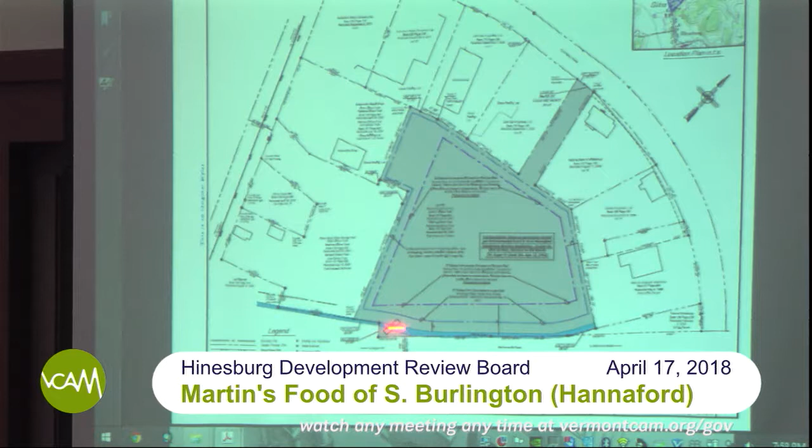I find it hard to believe that attorneys or engineers familiar with Vermont statutes and so forth did not have some concern about the enforceability of the plat line.

I just find it astonishing that with tens of thousands of dollars spent on this application, this issue had not percolated through the review process internally. Believe me, had we been aware of it, given all the issues there were, this would have been fairly minor in the context of everything we reviewed over 15-some hearings with this board. We would have raised it. So we were unaware of that. I'd like to believe that.

I believe an argument was made either in your application or in the staff report that some of the other buildings in this subdivision have been built within setback. There was a reference to the post office specifically, which is closest to the canal. I'm interested in knowing what part of that building is within the 75-foot setback, or am I dreaming? I'm happy to respond to that.

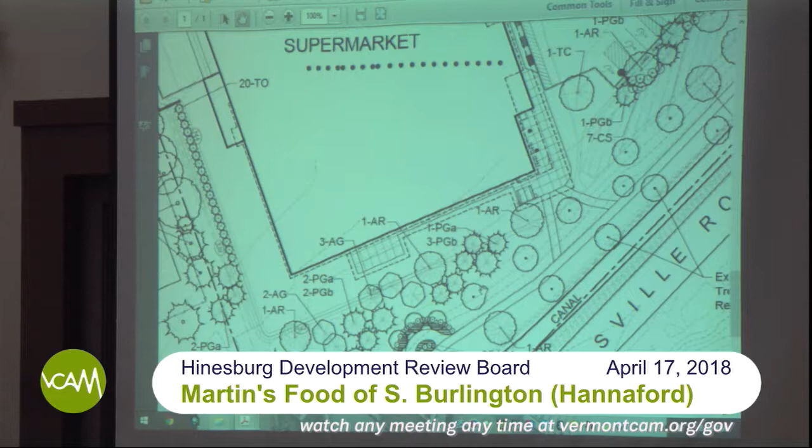And by canopy, you mean overhang? Yeah. How much is walking under that? We will be showing those when we get to the site plan review, but roughly 6 feet or something? Let me think about this - 30, 15, maybe. I don't want to guess at a distance here because I have not scaled it. I don't know. Okay.

But again, we're simply trying to be consistent with what was approved previously by this board, albeit we were not aware of the 75-foot shown on the plat - perhaps we should have been - and consistent with current zoning that's been in place for many years, and consistent with other decisions that have been made by this board previously.

Okay, can you move over to the parking lot area, Mitch?

Is this the area you want? So those are all parking spaces along the trees, trees on the outside. So this is the edge of the parking lot right here, right?

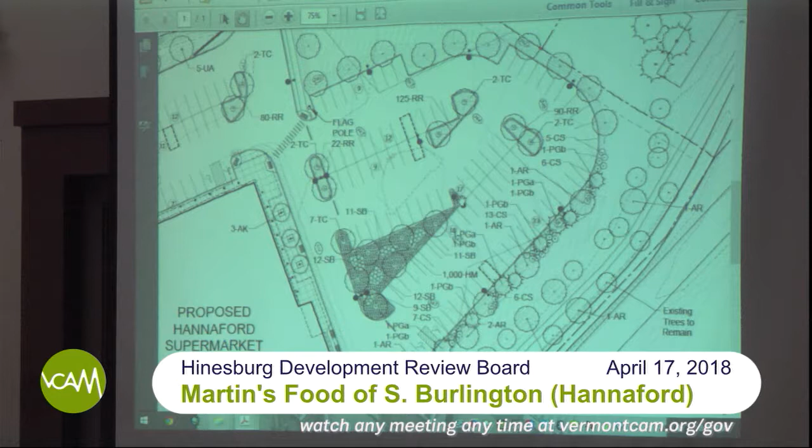Which is how far away? I don't know, Paul, do you have that?

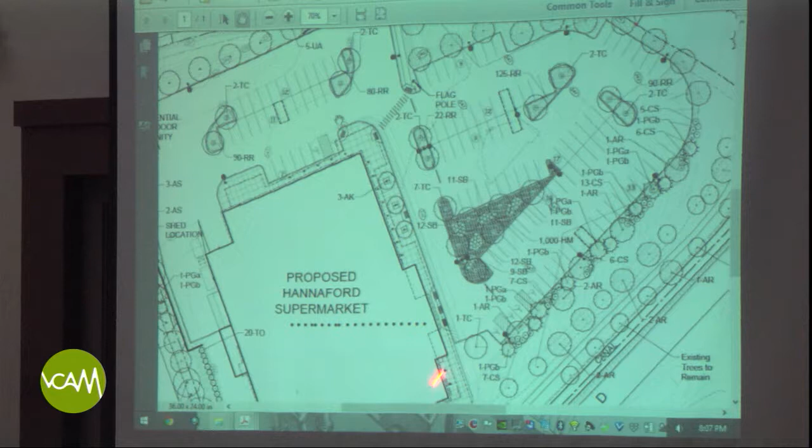And we did confirm, my estimate was about right, that the 75 feet just nips the corner of the main part of the building here. Most of the intrusion within 75 feet is the canopy. And there's a patio or something on that side, is that true? Just under the canopy or more than that? Under the canopy. Yeah, and then there's a smaller canopy that extends along the side, and then it jumps out.

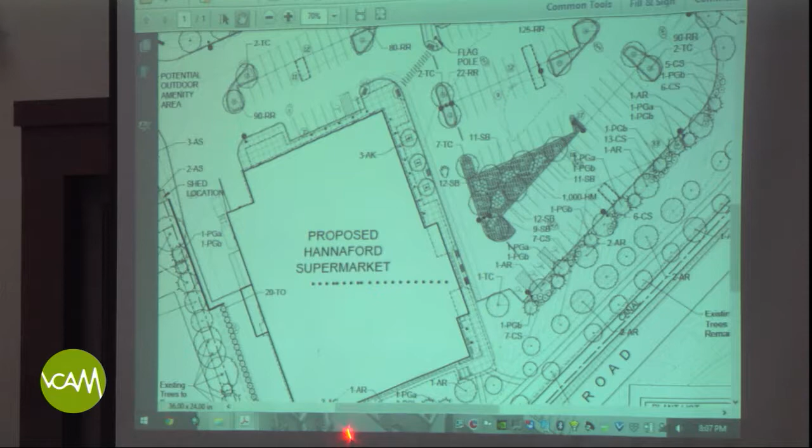What we're trying to do is really treat this corner particularly, but the entire side, so that it really kind of addressed the pedestrians coming in. So what does the canopy more to the back cover? So I see the reason for the sidewalks coming off of the path to the corner canopy, but the one further back, I assume that's not a main entrance to the building?

No, there's no entrance there. It's an architectural feature. It's possible that there'll be a picnic table or something like that under it, but it is not. That'd be more for employee kind of thing.

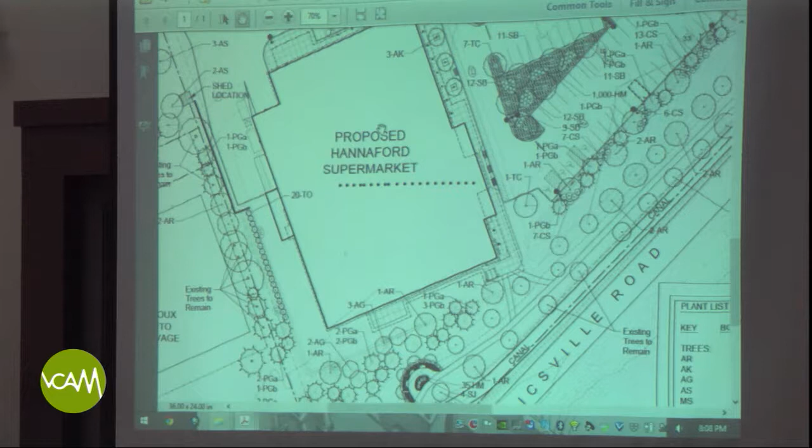Yeah, and I've not measured it, but that may well be more than 75 feet. Paul, could you quickly double check that? And remind me, do you have truck circulation going around behind? We do not. Truck circulation ends here. It does not circulate around the building.

And again, we'll get into these site plan issues. I'll describe the site plan more thoroughly when we get to that part of it. Okay, Paul, do you still have that, my scale there? You can. Okay, so the question was?

How far, Mitch, if you can scroll back so we can see the canal. How far is this portion of the canopy at its closest point from the canal? 80 feet. Okay, so that's already outside the setback.

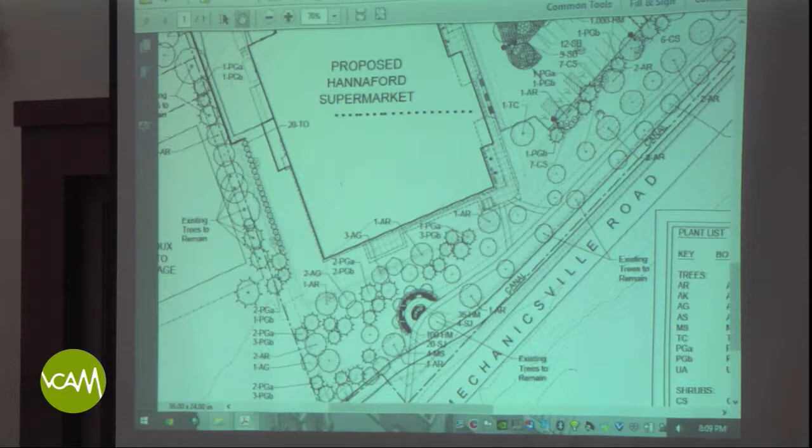Can I ask a clarification question? Is that 75 feet from the top of the bank or the average water line? What is that from? Well, in the case of the canal, it's got a very solid vertical edge, so it's really from the edge of the canal, which is the top of the bank. Well, it's top of bank, and as it rises and lowers, it doesn't change where that edge is. I'll just add that regulatorily, it would be from the top of the bank.

Board members have any other questions? Well, go ahead. The other setbacks that we're looking at modifying in the subdivision, give us the context of those and whether you're in them in the current design.

So again, historically, it was a 30-foot setback, and the current zoning is a 10-foot setback. I'm not aware of being within 10 feet anywhere. I wouldn't absolutely swear to that. Paul, do you know if we're within 10 feet anywhere with parking or anything around the site? We're right to the setback. Okay, because we designed it to the 10-foot setback.

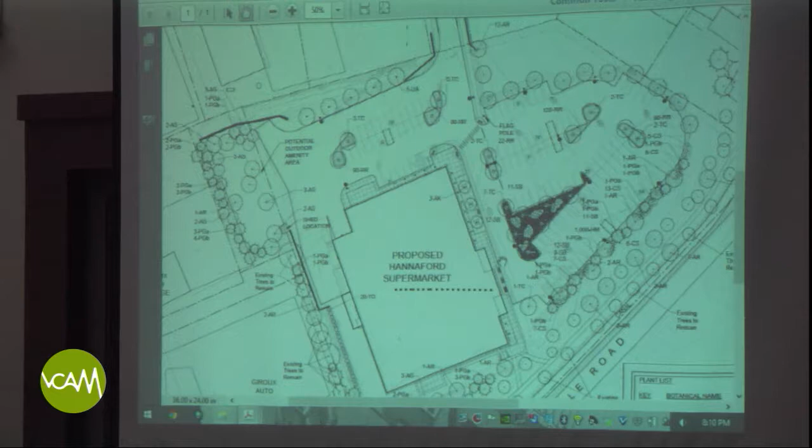So we may be within the 30-foot setback. We probably are here. We may be back here. That's what I was asking about. Okay, 30, where you are, impinging on the 30-foot setback. We have designed it for the 10-foot setback.

Point of clarification: is snow storage an allowable use outside of the setback? Yes, our regulations only require that parking areas be 5 feet from a property line. Structures must meet the setback requirement from property lines, but the regulations are silent on snow storage. That area is also used for parking, so when there's no snow, it's potential parking within 10 feet, or within the 30 foot boundary that's being reviewed.

So I have a question for our staff. It seems uncommon that a subdivision plat would explicitly show setbacks. I've been involved in a lot of subdivisions, and I don't remember us ever requiring a plat to explicitly show a setback, because the intention is that it's adjustable by the town as regulations change over the years. Is it uncommon that this particular lot has a setback shown?

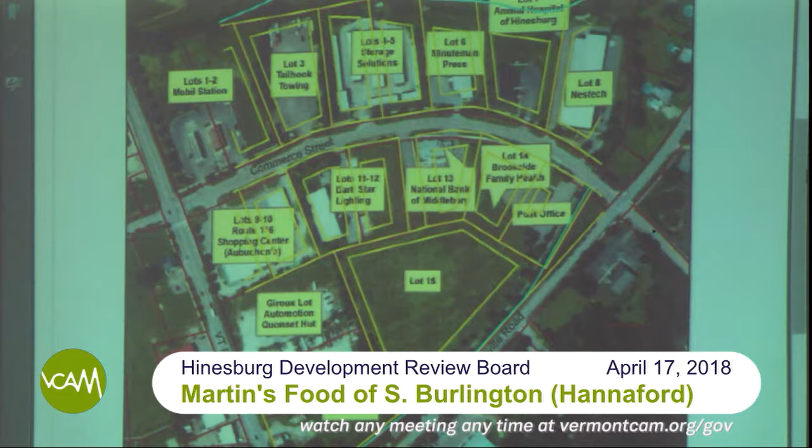And that's all I've got. Setbacks—you're just talking about the stream setback, not the other setbacks to boundaries? I've been focusing only on the setbacks to the canal.

Okay. The original plat called it a building setback—I don't know what the zoning at that time called it. My understanding is it was done to protect the stream. Well, I'll tell you for the record, it was actually the building setback matching the stream setback at the time of the regulations.

I just wanted to clarify, because I wasn't sure if you meant just the canal—there are buildings now built that don't meet the actual setback, but you're not talking about those other setbacks, just the canal. What are you talking about when you say there are other structures that don't meet the setbacks? National Bank of Middlebury followed the 10-foot setback in this area over here—that has nothing to do with the stream setbacks. I just wanted to make sure, because part of what you said could be looked at both ways, and I wanted to clarify you meant just the stream setback to the board. I thought I mentioned that. That is correct, my focus was on the setback to the canal and the stream when I was talking about that.

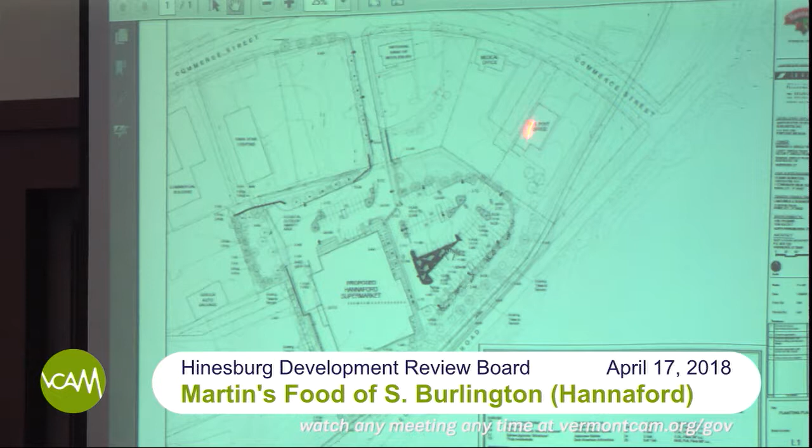So this is on Lot 15 of Commerce Park. On the plan here we have Mechanicsville Road, and this is Commerce Street, and just off the plan is 116, right over here, heading north-south. This is the Bank of Middlebury, this is the post office, and there is the existing man-made canal that comes along here. Patrick Brook is well off this plan, but behind the lots on the opposite side of Commerce Street.

We're proposing a 36,000 square foot supermarket. The building, which I will show you a rendering of in a moment, the architecture for it is custom designed for Hinesburg. There's not another one like it, and it grew out of a charrette process that we did here locally.

The plan includes enhancing pedestrian connections so that there's a missing section of sidewalk along Commerce Street through here, which we will infill. We will then take the existing sidewalk that comes along past the bank and extend that into the site. And then we will also connect the path that goes along the canal with a couple of approaches, one if you're coming from the north and one if you're coming from the south, into this corner of the canopy along the front facade of the building.

The building itself, this is where the front entry is at this point. The canopy wraps around 3 sides of the building, providing some real architectural variation. Again, you'll see that in a moment.

There are a total of about 128 parking spaces located both beside the building here on the north and along this side to the east. The loading occurs back here so that trucks will come in. There's a hammerhead at this point. They pull into and then back in before then circulating back out in that direction.

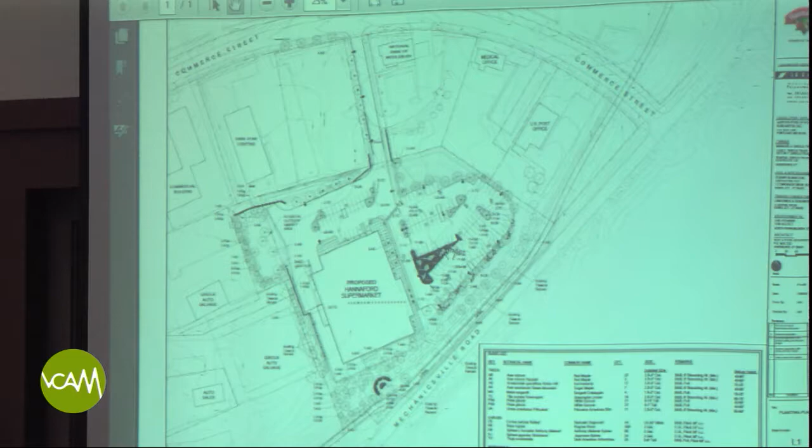For those who prefer to be on a paved area working out of the back of their trucks, they could be here. So we've offered to the town that as well. So those are the basic elements of the site plan.

I will say there are some off-site improvements that relate to traffic. I will not go through those today because traffic is scheduled for a hearing sometime in May, perhaps the 15th, and we'll go over those at that time. But there are some off-site improvements associated with this. I think those are the key elements there.

If you'd go, Mitch, to the next one, 03.

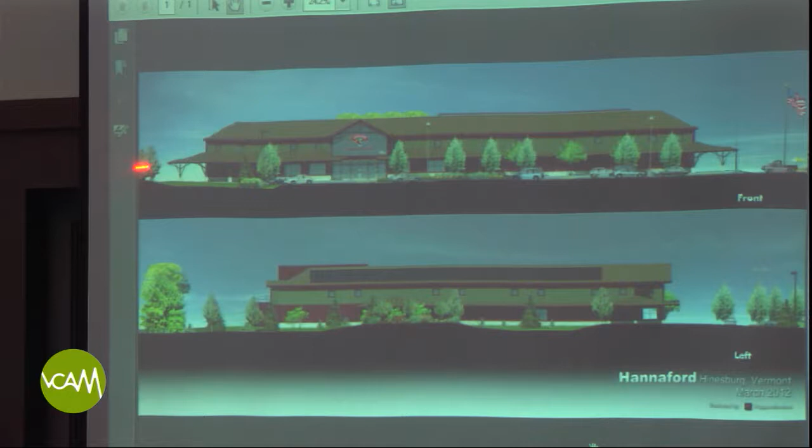So this is a quick look at the building and the design for the building. This is the eastern facade that would face the parking lot. This is the main entrance to the building. You can see the canopy here. This is the area that projects, that edge there is within about 43 feet of the edge of the canal.

And the canopy wraps along the building and then also around the other side over here toward the north. The entryway is here. You've got rain protection and so forth walking under the canopy along in that area. And it's a two-story sized facade, with windows along here that actually allow light into the building, so those are functional windows along that upper story.

This is the southern facade that would be facing toward the canal and Mechanicsville Road. Again, you've got the two-story facade with the windows, and the canopy that extends along here. We also have solar panels as part of this facing south — those are photovoltaic panels along that southern facade.

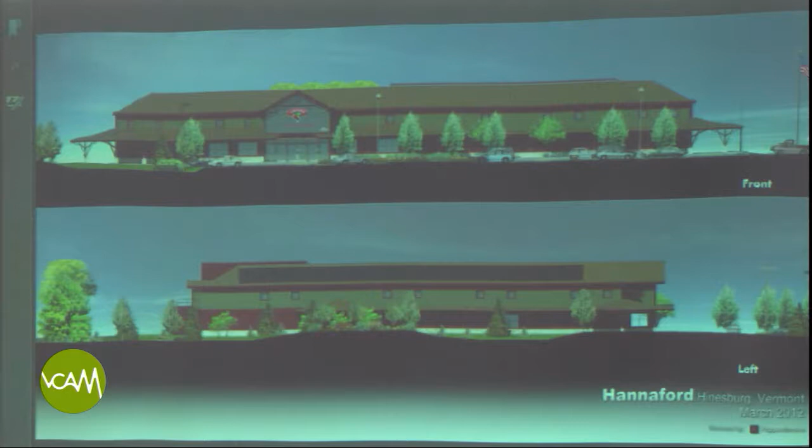And again, this is a unique design that came out of a charrette process that we held open to the public here back 5 or 6, 7 years ago, whenever it was. So it's specific to Hinesburg. We can see the next one, please.

So at this point — actually, I'm sorry, would you back up to, I did want to talk about one other thing. Sorry, I forgot. Go to number 2 again. One other thing I wanted to discuss. So this plan that you're looking at here is in almost all respects, with the exception I'm about to describe,

identical to what was approved by this board, by the DRB in 2012. The one area of exception is here along the northern edge of the lot. At the time the DRB approved this, our stormwater design — and our civil engineer will talk in more detail about stormwater in just a moment, but I want to give you just a quick overview.

The stormwater flows from this site today through a 30-foot wide easement and swale that's right along here between Dark Star and the Firehouse Plaza. It goes through a culvert under Commerce Street and into a stormwater basin on the northern side of Commerce Street before it ultimately discharges into Patrick Brook.

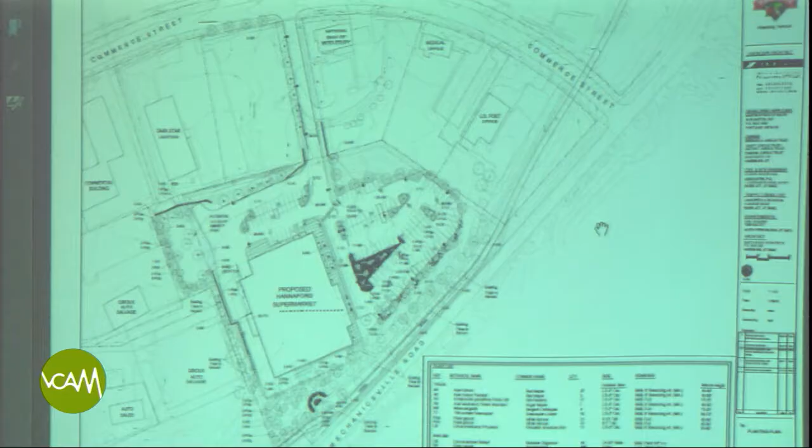So is the treatment occurring in a different location? The treatment is occurring there now, rather than here. And is this the configuration that was approved by the environmental court? That's correct, this is as approved by the environmental court.

And then reversed by... the issue was briefed in the Supreme Court and then not reached. Okay, so it's still open for discussion.

So with that, I'd like to turn over to our civil engineer, Paul O'Leary, who will go through more details relative to the stormwater, because that's the major focus this evening relative to site plan. All right, thank you.

So if we work backwards from Patrick Brook, existing between lots 2, which is the gas station, and lot 3, which is Tailhook Towing, is a grass drainage swale that goes down. There is an outlet structure on that property, it's essentially non-functional. There's a culvert that crosses Commerce Street right here that feeds that swale.

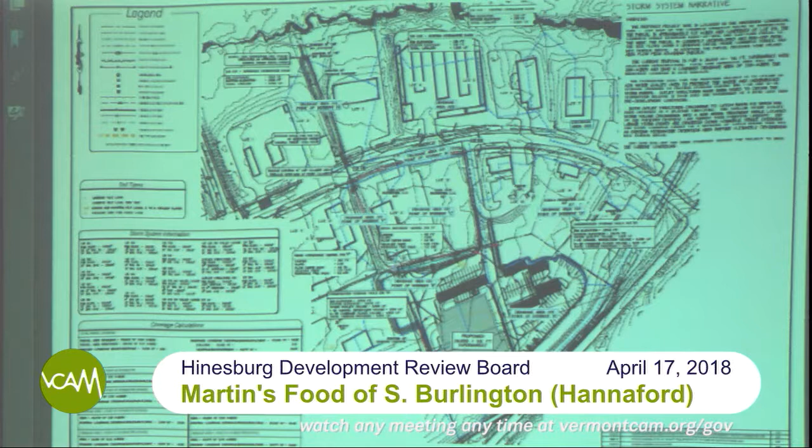So when we were designing the system, we collected all in a catch basin, and then - why don't you go to the next sheet so we have a little bit bigger scale, please, Mitch, S2.

So we have a collection system here, an underground detention area, and a catch basin that collects some of this building and most of this area, and then the catch basin discharges to what's called a water quality unit. The water quality unit is a 4-foot diameter pipe, 40 feet long. It has an oil water separator in it and a grit chamber.

Under the old state of Vermont rules of the 2002 stormwater rules, we got no credit for installing this pre-treatment device. Basically, the state determined if it's not listed in our rules, we won't give you credit for it. But the water quality unit typically removes 80% of the total suspended solids and somewhere between 40 and 50% of the total phosphorus that comes through. So it is a very effective treatment device.

So we have one here that feeds this system, and then we have another one right here that feeds this system. So all the stormwater collected goes through this water quality unit before it goes into storage. Once it goes into storage, we have another water quality unit. It's called an isolator row. There's an isolator row in this system, and then there's one in each of these individual systems, so a total of 5 different isolator rows.

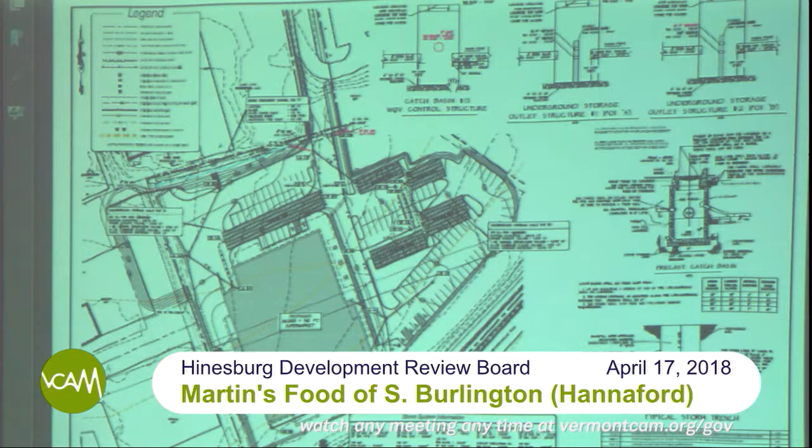And the status of your state permit right now - you have a state permit? It's been issued, it's been appealed. That's the second. The first permit, as David said, was issued and was not appealed. We amended the permit to move the treatment swale from between Dark Star and Firehouse Plaza to this location. That permit was issued, and that permit's been appealed to environmental court.

Well, does that mean it's been remanded by the Supreme Court, or it's just kind of held in abeyance, waiting for the remand of everything else? I'll let the high-powered help address that. So. All right, never mind. I'm happy to address that. It has not been reviewed by the Supreme Court. It has been appealed to the environmental division, and there it sits until it all gets gathered together into hopefully one big hearing process.

So I just have a question, sorry, thank you. You've mentioned how we've gone above and beyond for the 2002 regulations. I know it's in litigation about the next - the 2009 regulations, if that's... my dates may not be right, no, the 2017 regulations, right, the most recent. What are the elements we're looking at? Where are we not compliant with those 2017 regulations?

We haven't examined the 2017 regulations in detail and gone down through it point by point. The only way we can really do it is to almost prepare a 2017 application - the new application process is substantially different than what it was in 2002. So it's hard just to look and compare.

The elements are the same. You're looking for recharge, you're looking for water quality, you're looking for channel protection, which is the 1-year flow, and you're looking for overbank protection, which is the 10-year storm. So initially in the 2002 rules, we met all 4 of those requirements. The 2017 rules, I can't say - we haven't gone through it point by point.

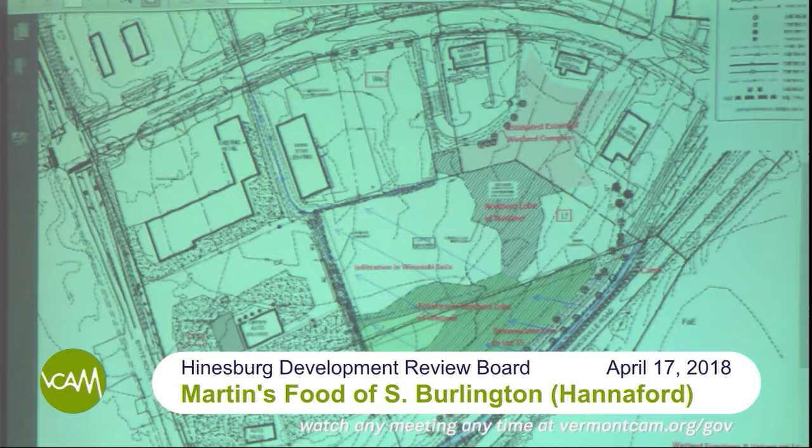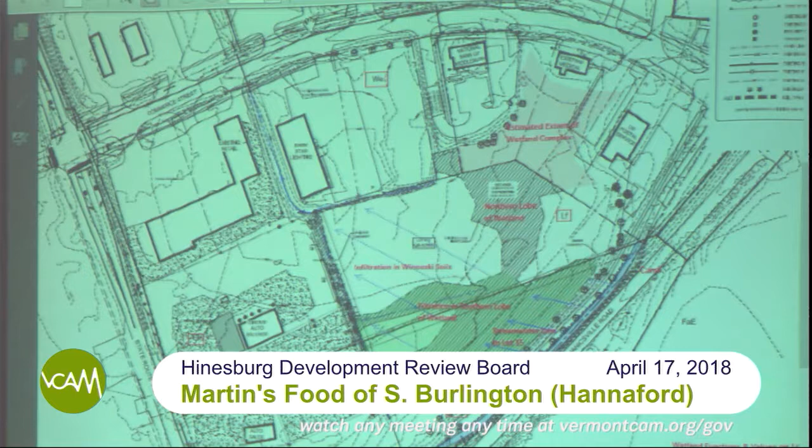The first exhibit is their existing conditions map. It shows the NRCS soil distribution, the wetlands that have been mapped, and generally shows the presence of a sand lens that extends from the canal downslope, ultimately defined at the western limit of Lot 15. Applicants delineated a large wetland complex on Lot 15 and surrounding lots, several acres in size. It's defined on that exhibit. The wetland is caused in part by the seepage of stream water from the canal onto Lot 15.

Soil borings by the applicant define a sand lens about 5 feet deep. That is well defined on that. Can you go to the next exhibit? Sure. Let's see if it's the right one. Not that one. Okay, sand lens—right there.

And if you can blow that up for me. Is this one of the ones on our Dropbox, Alex? Yes, for those of you in the right Dropbox or Goodreader spot, this one's titled 'Revell Sand Lens.' It defines the 5-foot thick sand lens bounded by the green lines on the north and the south, emanating from the canal and defined leaving the property on the western boundary.

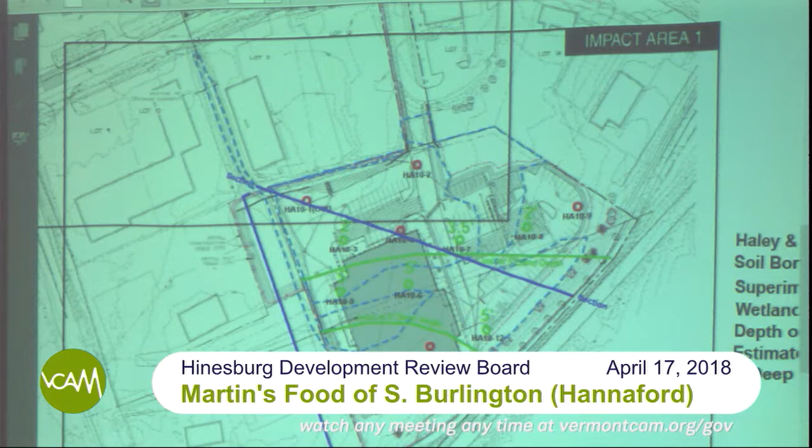They're the only ones that exist on this, and I didn't put in my own. Soil borings by the applicant revealed a sand lens. I've just described it. The seepage from the canal flows through the sand lens, which represents a natural sand filter, and it flows in the direction of Patrick Brook on the north side of Commerce Street.

Your third page here, if I can ask for some information, is that you're saying the sand lens would be dewatered because of the drainage out of some of the underground tanks. What impact does that have?

You're going to dewater that shallow groundwater system. That is going to reduce groundwater storage, which over time would represent the base flow or low flow recharge to the brook. It would also reduce the amount of groundwater recharge down gradient of this system, extending onto other lots within Commerce Park. Not only does the sand filter the groundwater, it also acts as a sponge, holding water for later release to the stream during low flow periods when groundwater is the most important source of that stream flow.

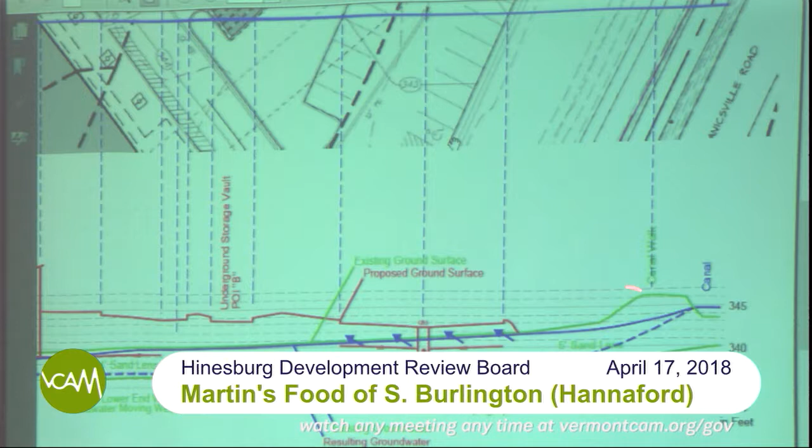All right, we start with the canal. You can see the ground surface in green. You can see the existing groundwater system in the upper blue. You can see the proposed ground surface in red. You can see the underground storage vaults sitting in the water table in red, the square.

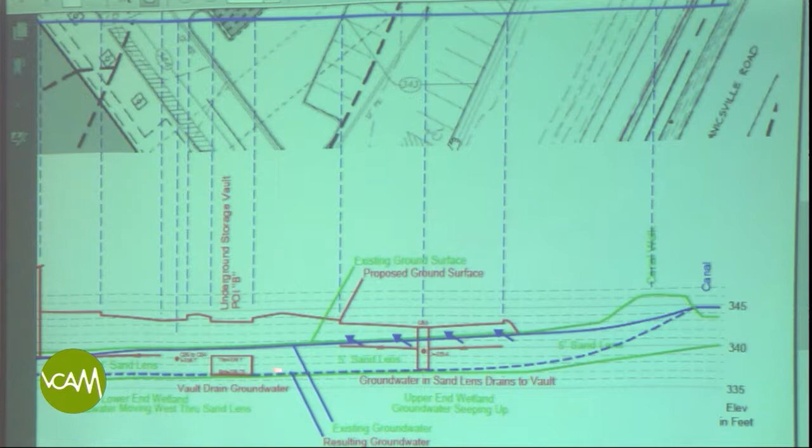The drainage to a vault, part of the stormwater system. Let's keep moving to the left, please. And obviously you've got your 4-foot and 5-foot sand lens that I've been discussing.

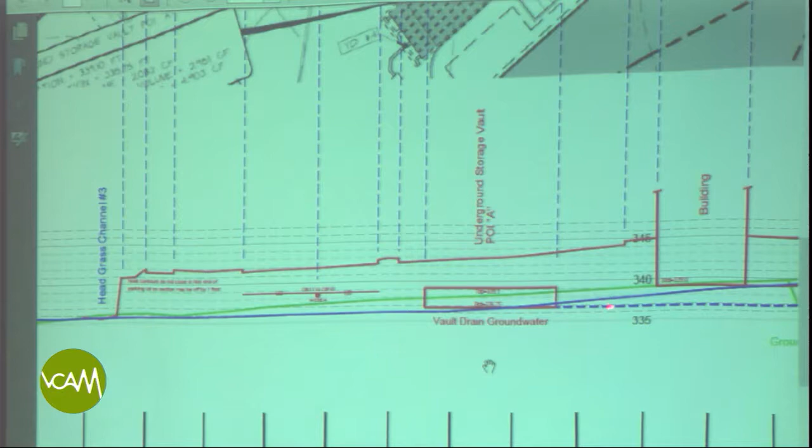You can see the imposition of the building on this overall cross section. You can see the downslope vault, groundwater, the chambers again, and if you go back to the right a bit, you can see the upper blue, which is existing groundwater level, and then the lower dashed blue, which is the lower, imposed, or dewatered groundwater system, at the base of the structures and placed beneath the parking lot stormwater system.

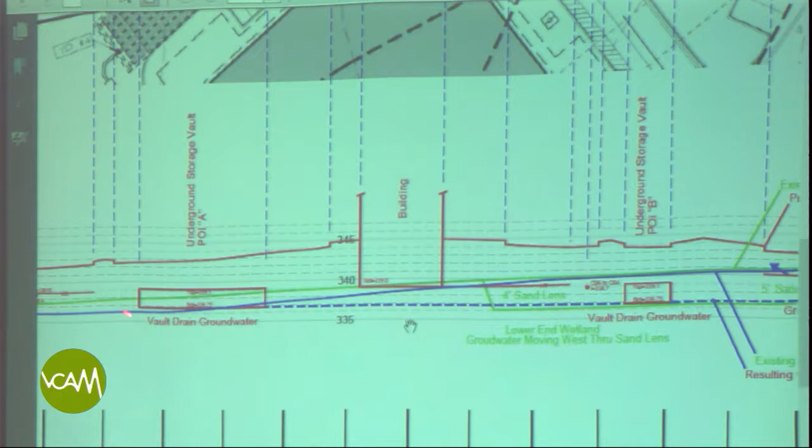Keep going to the left, please. You can see there the 2 to 5 foot fill, and then finally at the most down gradient end - keep going just a bit - I think you're there, you're dropping into that grass channel.

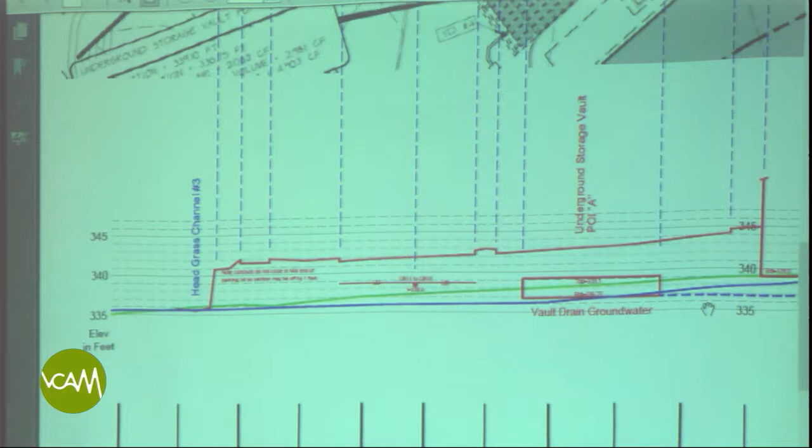A section of the site from the canal - much of this is what I've just described - through the fill pad demonstrates what will happen. The existing ground surface is the upper green, the canal is on the right side, the sand lens is depicted by the lower green line extending halfway across the section. The estimate of the lowered or dewatered groundwater table is the lower blue line, and finally on the far left is the swale at Dark Star.

The red line, obviously just described. The red lines are the imposed grade, the fill. What's the vertical exaggeration on this?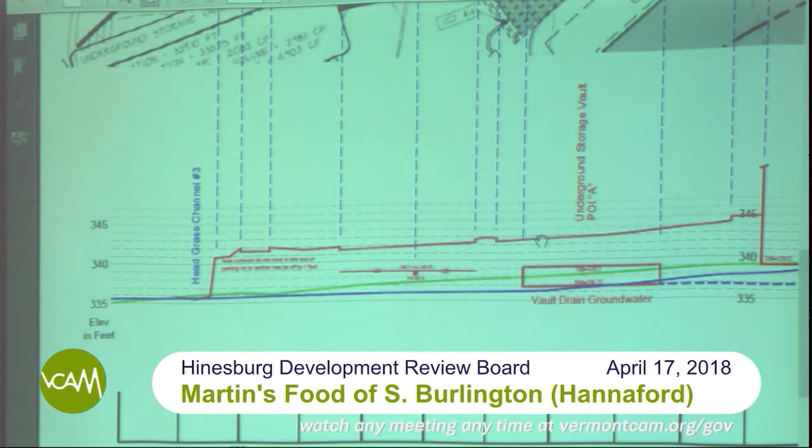The building foundation should just touch the existing ground level, but the stormwater chambers they are proposing will be placed 3 to 4 feet deep into the existing sand lens - in other words, into the groundwater system. The bottom of the chambers drain out through a pipe, thus dewatering the sand lens, as I've said numbers of times, eliminating the storage function of the wetland. Additional impacts on groundwater.

As if it wasn't bad enough, recent correspondence from the applicants suggests that in order to ensure they will meet the stormwater recharge standard, and Andres Terrazzo, following me, will discuss this, they may be excavating and replacing soils under the east-west swale, adjacent to the southern Dark Star property line. This would be done to turn the grass channel into a dry swale, suitable to meet recharge standard. A dry swale would need permeable soils and generally would require an underdrain. Note that we have not seen any plans yet for this dry swale, and based on the previous testimony, it appears to be a wet swale again, depending on some level of infiltration.